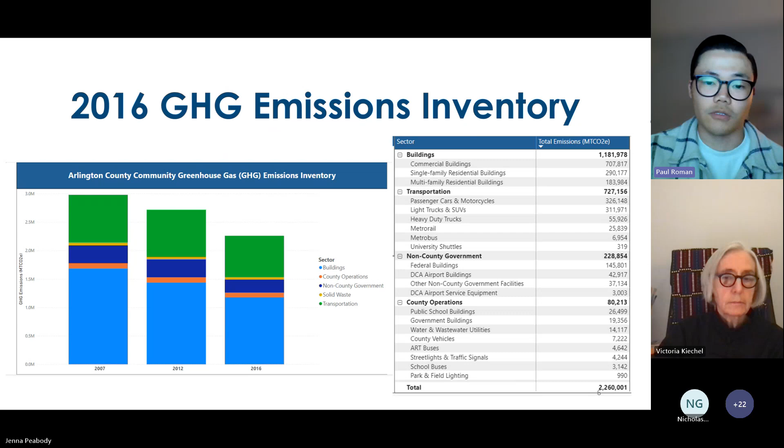As we can see from the figure, from 2007 to 2016, the overall emissions, but specifically the building sector, have continued to decline. But if the county plans to become a carbon neutral community by 2050, the existing properties within this sector and subsector need to be addressed. The GBIP needs to continue to focus on stringent energy performance and carbon reduction in new construction.

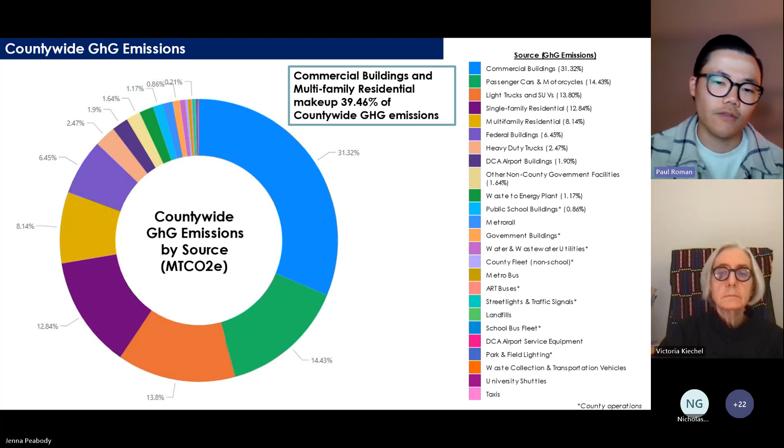Here's the further breakdown of the countywide GHG emissions. Commercial buildings and multifamily residential make up almost 40% of the countywide GHG emissions from the 2016 report, and then you have the other categories listed there as well.

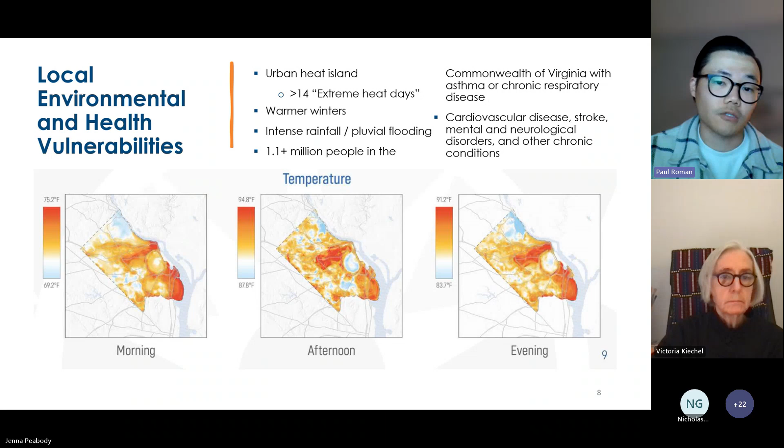When looking at the current scenario, as well as the future of Arlington County's climate, we can't forget to address the local environmental and health vulnerabilities. Due to climate change, Arlington is projected to experience more than 14 days of extreme heat over the next 30 years, which is over 105 degrees Fahrenheit. This leads to human health impacts, such as cardiovascular disease, asthma, stroke, and other chronic conditions. Regarding the environment, we'll continue to see warmer winters and also the potential for increased rainfall and flooding.

Lastly, under the community goals, the revitalization of underperforming and vacant buildings. Here we have referenced the county's Commercial Market Resiliency Initiative, or CMRI as it's known. You may or may not be familiar with this, but it is Arlington's strategy to achieve market-based solutions and address building supply vacancy rates by specifically repositioning and converting obsolete commercial inventory.

Based on the fact sheet, the commercial office vacancy rate has increased since 2019, which is in part due to the pandemic, and in return, the share of the tax base has declined. So to meet the new model of working, whether it be fully remote or hybrid, the county created CMRI 2.0 to meet those changes in the market.

We're working closely with the county's Economic Development Office to cross-functionalize CMRI and the Green Building Incentive Program, as the intent is to lower EUI, reduce carbon emissions, and economically revitalize neighborhoods.

Now we'll look at the history and evolution of the GBIP and industry standards.

The county's Green Building Incentive Program has a rich and detailed history. I'll provide a short summary for those in attendance if you're not familiar with it. It was created in 1999 and adopted by the county board shortly thereafter, and it started as a pilot program. The purpose was to establish a voluntary program to incentivize private sector high-performing buildings beyond state code and Dillon rule restrictions. The original program only applied to commercial office spaces and offered up to 0.25 FAR bonus density in exchange for obtaining LEED Silver certification from the United States Green Building Council.

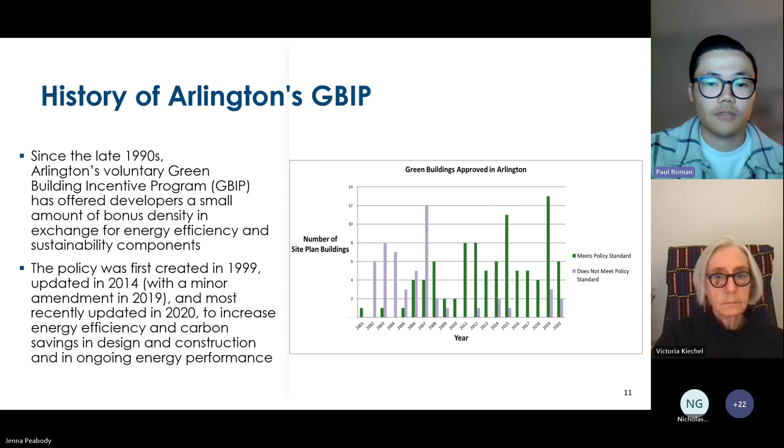The trending industry standards set up the conversation for the full debrief of the proposal in the forthcoming slides. Through our analysis and benchmarking literature review of other jurisdictions, as well as insight from industry leaders regarding new sustainable technologies, updated certifications, and more, these are 4 key areas that we've targeted in the proposed GBIP update.

Starting with performance-based certifications in areas such as the Commonwealth of Massachusetts, adopting a stretch code that requires a third-party certified energy rating, and in the state of New York, where they have not yet adopted the proposed update to their stretch code, but for the 2023 stretch code, NYSERDA is including a way to incorporate the Passive House standard. Next is accountability and performance standards.

So this can be done through benchmarking, or via a third-party certification that is based on actual performance and not predictive modeling.

And third is the design focus on passive strategies. We're seeing buildings within our climate zone that are designing and constructing passive buildings, which then in return avoids energy intensity and provides healthier and safer spaces for tenants.

And lastly is the decarbonization emphasis. As we know, the most sustainable building is the one that's already built. So through adaptive reuse or existing building retrofits, one has the potential to lower its operational carbon and ultimately create less embodied carbon.

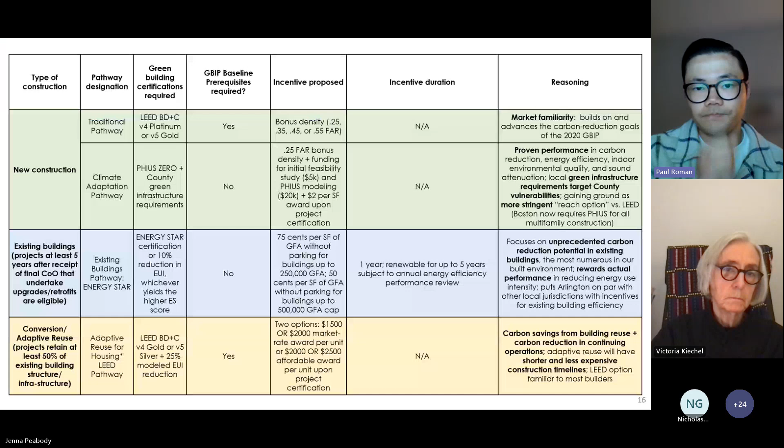Here's the chart of the GBIP proposal. In the coming slides, we'll break this down into each section, but this provides a high-level summary. Starting on the left-hand column, there are 3 types of construction for this GBIP proposal: first is new construction, second is existing buildings, and third is conversion or adaptive reuse. And then each type of construction has a designated pathway.

So starting with new construction, there are 2 options. The first is the traditional pathway. This is like the current GBIP, in which we're offering bonus density to incentivize private developments, but we're proposing an upgrade from LEED Gold to LEED Platinum at the lower FAR tiers, as well as updating and proposing new baseline prerequisites and extra list items. And at the higher FAR tiers, we're proposing International Living Future Institute's zero carbon or zero energy certification as 2 options in lieu of LEED.

International Living Future Institute, or ILFI for short, is based on actual energy performance rather than predictive modeling, as well as requiring no combustion on site. So keeping the traditional pathway as an option for new construction will build upon and advance the carbon reduction goals of the current program. And the second option for new construction is the climate adaptation pathway.

This pathway will use Passive House Institute US, or PHIUS for short, but the program's zero certification. If you're not familiar with PHIUS, it is today's highest building energy standard that relies on a combination of passive design concepts to immensely reduce the building's energy use intensity. And much like ILFI, this certification is based on actual energy performance and requires no combustion on site.

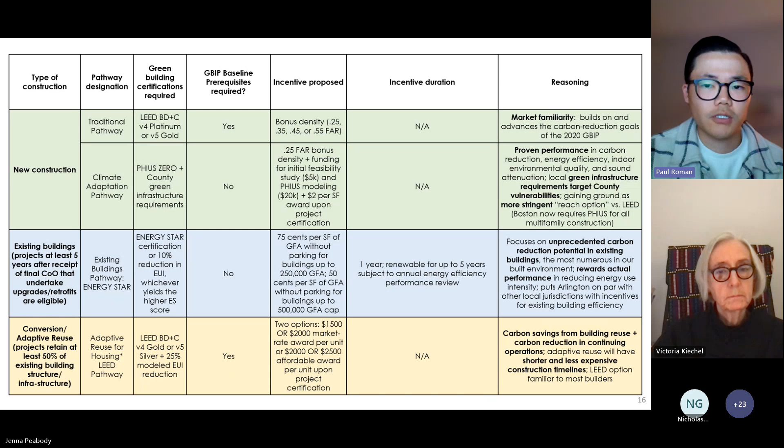And then finally is the third type of construction, conversion or adaptive reuse. The main reasoning behind this is the immense carbon savings from building reuse and carbon reduction in continuing operations. This pathway will be for existing commercial buildings that are converting to residential, and we're proposing a financial incentive in 2 options. The first being a market rate award per unit, and the second is an affordable housing rate award per unit.

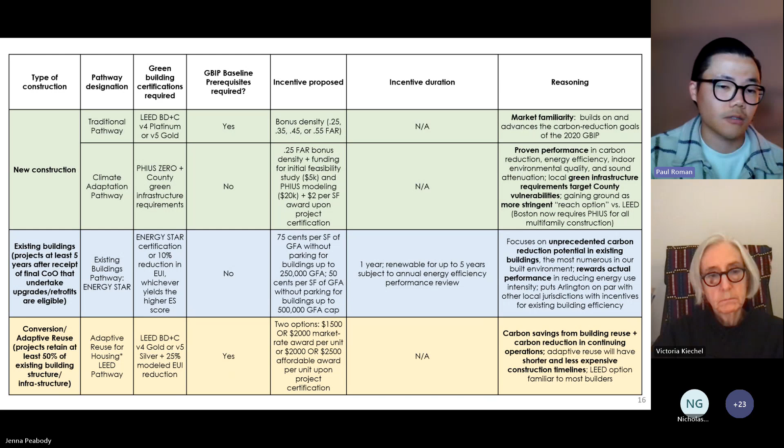And for both incentive options, the applicant will need to be awarded LEED version 4 Gold or LEED version 5 Silver when USGBC ballots the newest version of LEED, as well as a 25% energy use intensity reduction. Jenna, next slide, please.

So now we'll start to provide more detail about each type of construction and designated pathway, starting with the traditional pathway and new construction. Next slide, please.

I'm not going to reiterate each line item here, but as I mentioned in the prior slide, the traditional pathway under new construction will be like the current GBIP. The bonus density tiers remain, aside from the 0.70 FAR. There is an upgrade to LEED Platinum from LEED Gold at the lower FAR tiers, and there is also the removal of LEED certification at 0.45 and 0.55 FAR with the replacement of the ILFI options. In the coming slides, I'll provide further detail about the updated and new baseline prerequisites and extra list items.

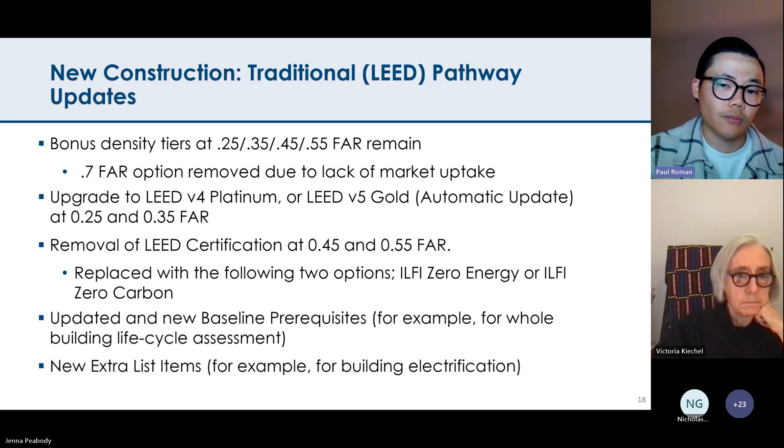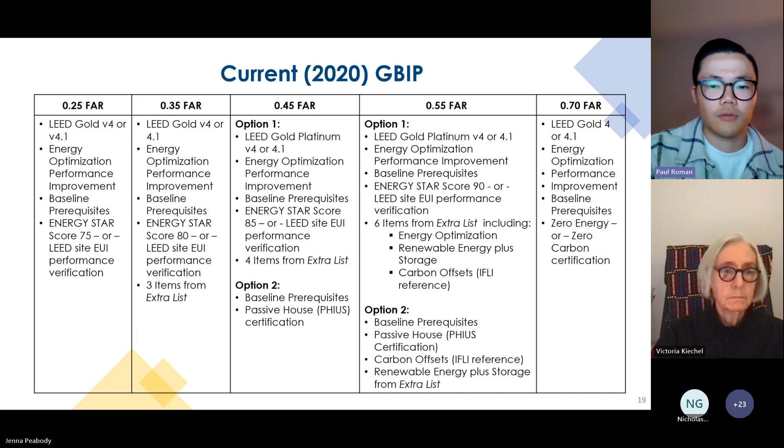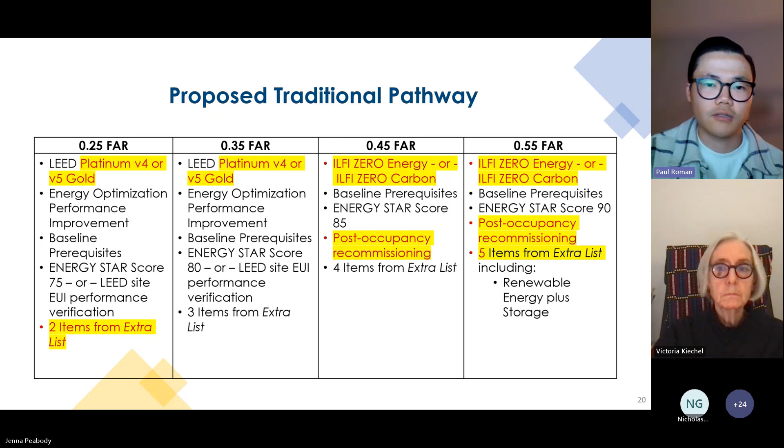The next updated baseline prerequisite is equity, diversity, and inclusion. We're proposing an update to the language that reflects the county's goals, as well as the significance and importance of EDI in private real estate development. There are 3 proposed options that a project may choose from for this prerequisite.

The first option is to complete an environmental justice assessment using the Building EJ tool, then provide a narrative based on those findings and what the project team will do to assess environmental justice and social equity issues within the development surrounding area. The second option is to align with International Living Future Institute's Living Building Challenge Core Imperative 17, Universal Access, which essentially makes all public space on a project accessible to all members of the public, and also includes the principles of universal design for those with disabilities.

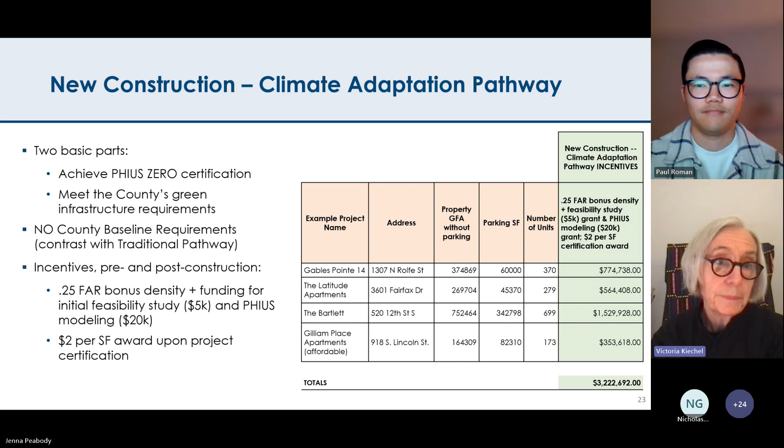So why is it more rigorous than LEED? It is because it relies on Passive House Institute US certifier. It was a third party that comes to the site and does much testing. There is a certain amount of verification that happens under this pathway that does not happen under the traditional pathway.

We also hope that developers are encouraged by the absence of the baseline prerequisites. It also integrates equity in green infrastructure. You'll see in a minute in the green infrastructure items that there is a tree canopy, a tree equity item. And even more important, these actions embodied in the climate adaptation pathway really are meant to address local Arlington County vulnerabilities.

Certainly flooding, we will require in this pathway that a certain amount of stormwater or rainwater be dealt with on site. Because of the green infrastructure requirements, this is aimed at reducing urban heat island. It's certainly true that the green infrastructure part will help with atmospheric pollution, with air pollution.

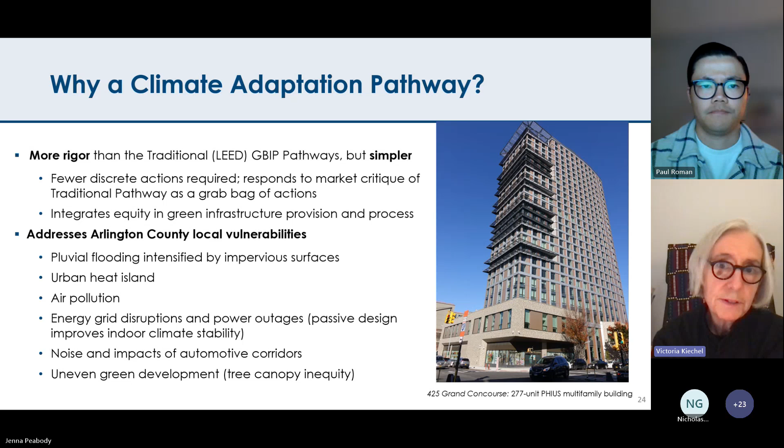Here's more about PHIUS Zero. It is aimed at reducing these loads, heating and cooling. Some studies done in the last three years say that the cooling energy loads in our climate zone may be reduced by as much as 90%, which is extraordinary. I think 60 to 90%, 75%, figures that are, in whatever study you choose, at any level fairly impressive. It also, of course, reduces heating load, less of a consideration in our climate, but still a consideration.

It does prohibit fossil fuel combustion on site, so these are electric buildings. There is a requirement for renewable energy. You do not have to have renewable energy on site, although you may.

You can, in fact, use renewable energy certificates under PHIUS Zero. We think that element is important because when we get to the green infrastructure, we're part of the climate adaptation pathway, assuming people may wish to use those surfaces as green surfaces. I've mentioned moisture design, window or fenestration performance. One has triple-paned windows in PHIUS buildings. There's requirements for air sealing and ventilation, certainly Energy Star equipment. Some of this is, of course, embedded in the baseline requirements in the traditional pathway.

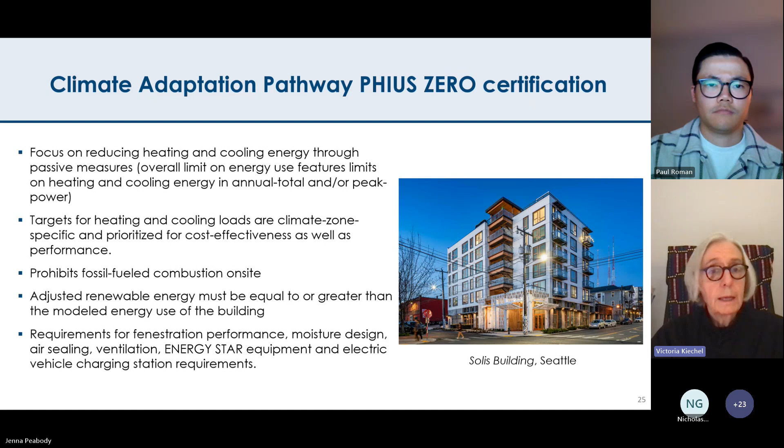Requirements for native species for planting, as you see. Tree canopy coverage—this is where Arlington County foresters will weigh in as appropriate to the urban density of the site and the available planting area, determining how much of the lot area should be covered by trees. The idea of tree equity: asking developers to contribute to an ecologically needy Arlington site that's been identified as lacking in tree canopy, by contributing to the tree canopy fund that EcoAction Arlington administers.

I mentioned the bioretention measures, 80% of stormwater runoff. That should help, we anticipate, with flooding and pluvial events. Lighting, dark sky requirements, and then bird-friendly materials.

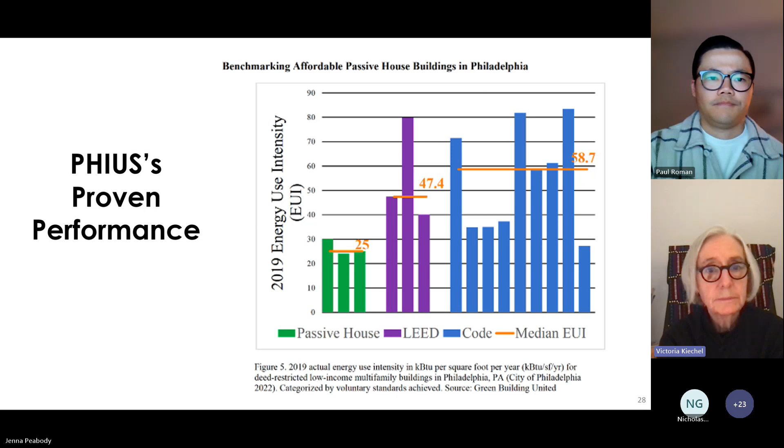And now, adaptive reuse—this is the second new pathway. Paul has already gone over the traditional pathway that is now updated. The climate adaptation pathway is an entirely new pathway, and this is also new, and we're very excited about it. Vacancy of office buildings is a drain economically, environmentally, and socially on our community. So we're really hoping that by incentivizing this as a per-square-foot grant, developers will take this up. We have certain requirements they have to meet—notably, they must retain 50% of their existing building and infrastructure to be eligible for incentives.

Paul had mentioned that this is where they're again going back into the LEED universe. We're asking that they meet V4, the present version of LEED, at the gold level, or V5 silver. Now, those are somewhat below what we're asking under the traditional pathway.

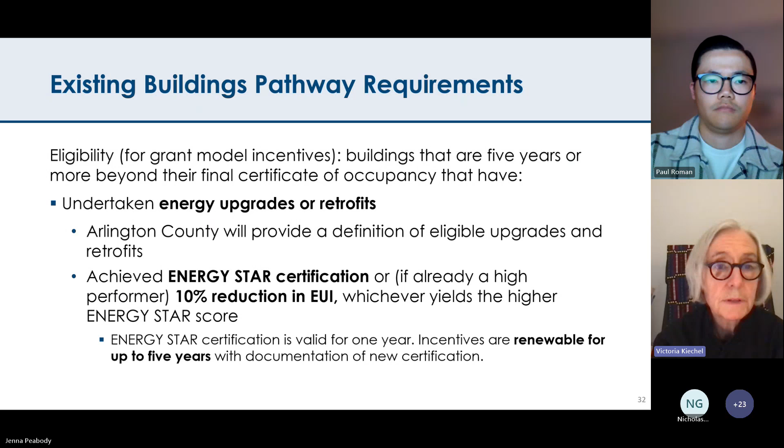So that is the end of the new pathways. We now have four pathways: two new construction, one adaptive reuse, one existing buildings pathway. And onward, Jenna, I'm going to turn this back over to Paul Roman.

Thank you. Great. Thanks, Vicki. I'll wrap things up, starting with the summary of incentives. Jenna, next slide please. So this reiterates and summarizes what each incentive is and for which pathway it's involved with.

Again, the traditional pathway in new construction will be bonus density only, and the remainder will be financial incentives, with the addition of 0.25 FAR to the climate adaptation pathway under new construction. Jenna, next slide, please.

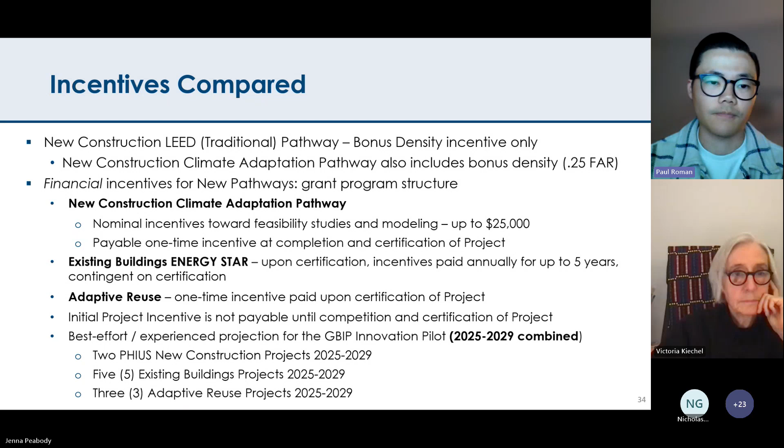And lastly, we have community benefits and how it serves multiple priorities within the county. For example, it replaces modeled savings with verified performance for buildings. It will lower utility bills for tenants through pathways such as the climate adaptation pathway using Passive House. And it creates healthier and resilient buildings for the community and its members. Jenna, next slide, please.

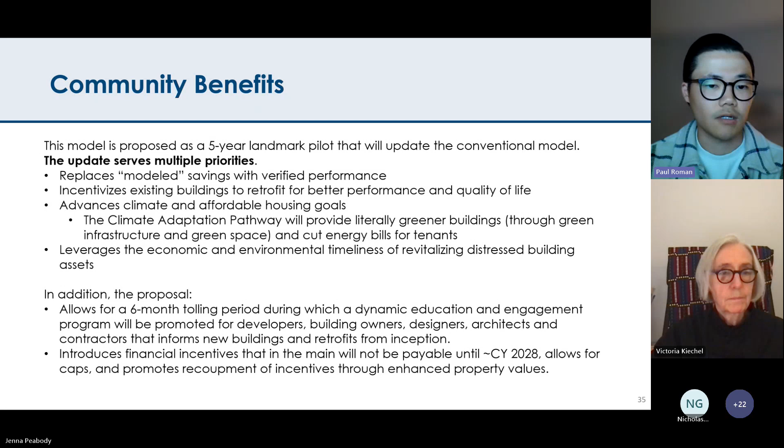Next steps and discussion. So just next slide, please. And then here we have the public engagement plan, probably fairly similar to what we've seen in the past if you've been part of public webinars or the public comment period for the Green Building Incentive Program. We have some of the key stakeholders involved at the internal engagement level, and then the extensive public engagement, with some of the key stakeholders as well there.

Again, the public comment period is part of this public engagement plan. We are going through more of these conversations internally and externally, so again, nothing is etched in stone with this proposal. It's merely a proposal, but we are considering everyone's feedback, taking their questions and comments, and addressing them in a timely fashion. And then if there's need for any revisions, we're going back and looking at this with leadership and county board members, and follow-ups will be addressed as well. Next slide, please.